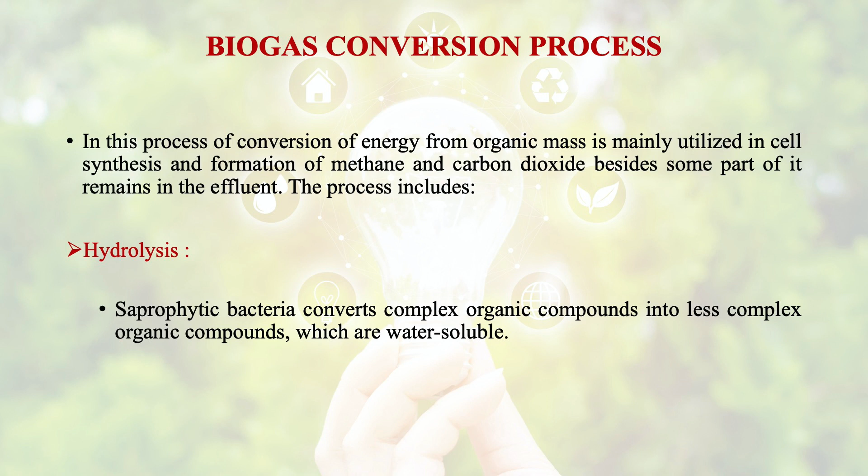The process includes hydrolysis, where saprophytic bacteria convert complex organic compounds into less complex, water soluble organic compounds. Then acid formation, where acid forming bacteria degrade organic compounds to volatile fatty acids and ammonia. Then methane formation, where methane forming bacteria utilize these acids to form methane.

What are the process parameters that affect biogas production? The process consisting of hydrolysis and biomethanation involves three processes, which we have discussed in our previous module. So what are the process parameters affecting biogas production?

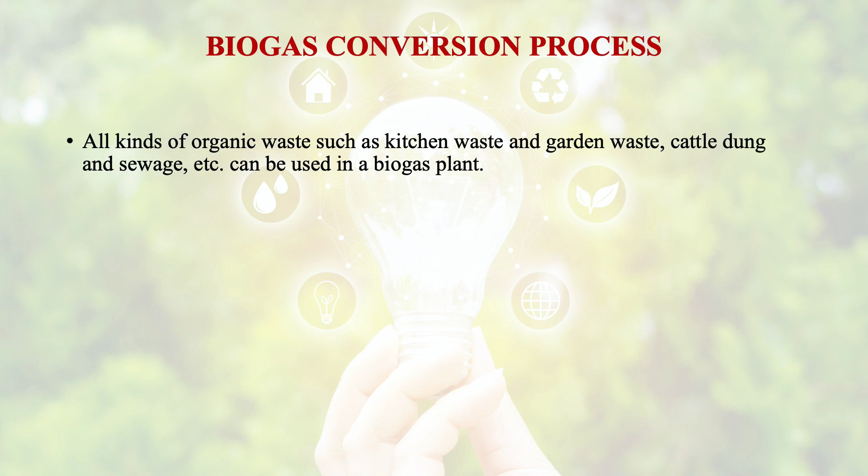All kinds of organic waste such as kitchen waste, garden waste, cattle dung and sewage can be used for the production of biogas. The efficiency of biogas production is affected by process parameters such as the amount of organic material, the digestibility of the material, and a combination of microbial and engineering factors.

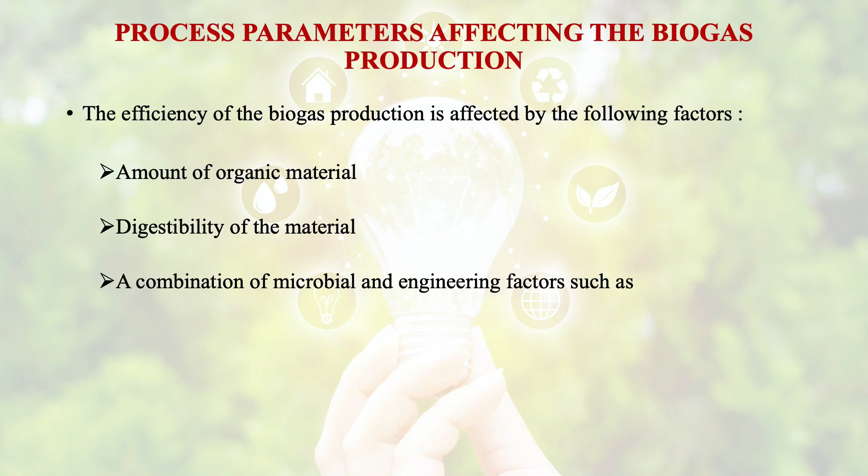The combination of microbial and engineering factors includes organic loading rate, solid concentration, retention time, temperature, carbon to nitrogen ratio, and toxicity.

Amount of organic material: it is obvious that whatever amount we feed into the digester, accordingly we get the biogas, and from the given input and output only we could calculate the efficiency. Another important factor is the digestibility of that material. For example, the digestibility of cow dung will be more than the digestibility of leaves. So it depends upon both the amount and digestibility of the material.

Then comes the combination of microbial and engineering factors, for which I have given some examples. Let's discuss the organic loading rate one by one.

Organic loading rate of a process is a measure of how much organic material is fed to each cubic meter of reactor volume during one day. It means per day, per cubic meter, how much organic material is fed. It will be in kg of VS per meter cube, or COD per meter cube per day.

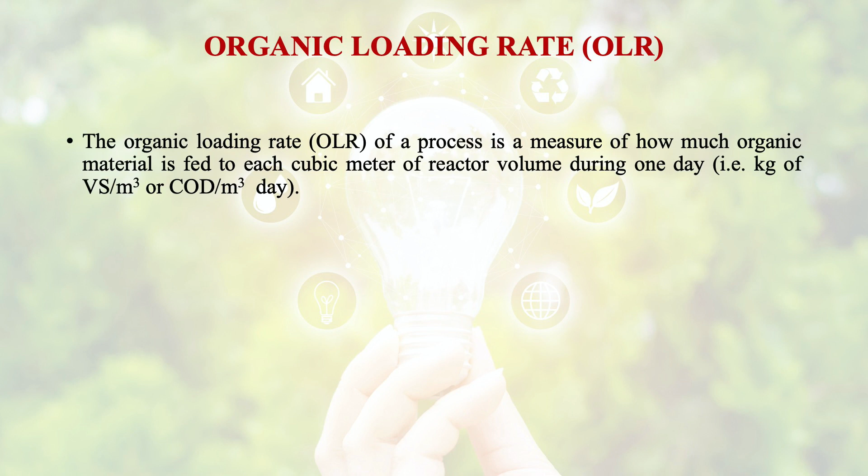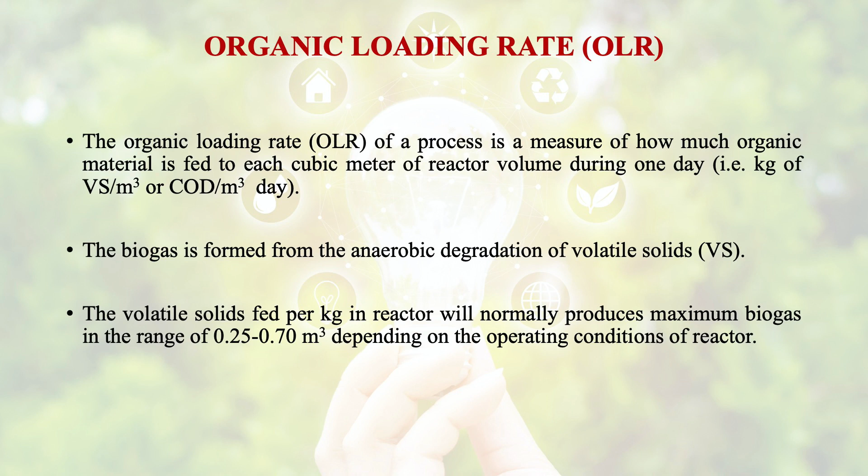Biogas is formed from the anaerobic degradation of volatile solids. The volatile solids fed per kg in the reactor will normally produce maximum biogas in the range of 0.25 to 0.70 meter cube, depending on the operating conditions of the reactor. Accordingly, the loading rate should be in the range of 1 to 1.5 kg volatile solids per meter cube digester per day, which is highly dependent on the reactor design.

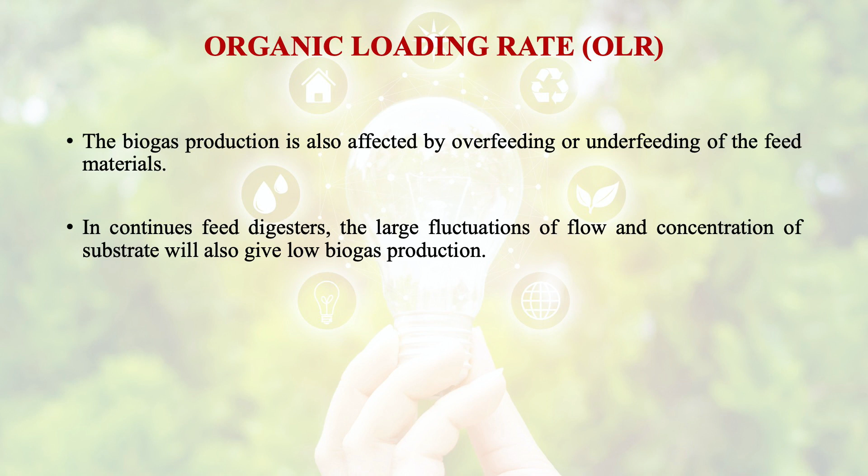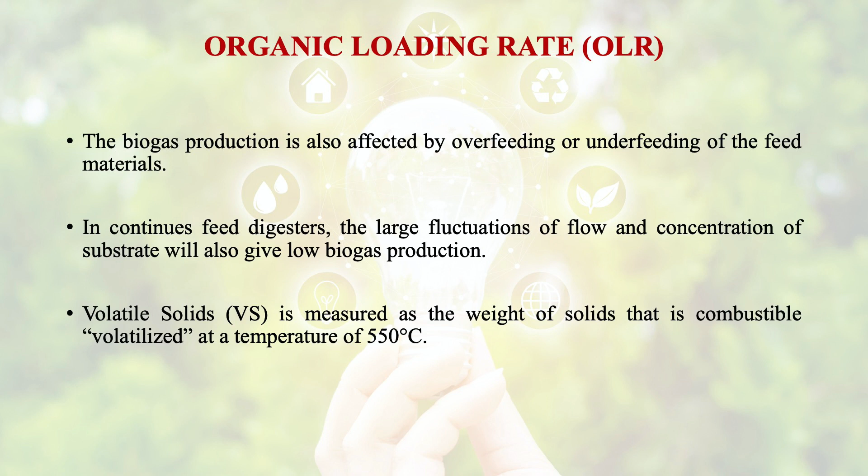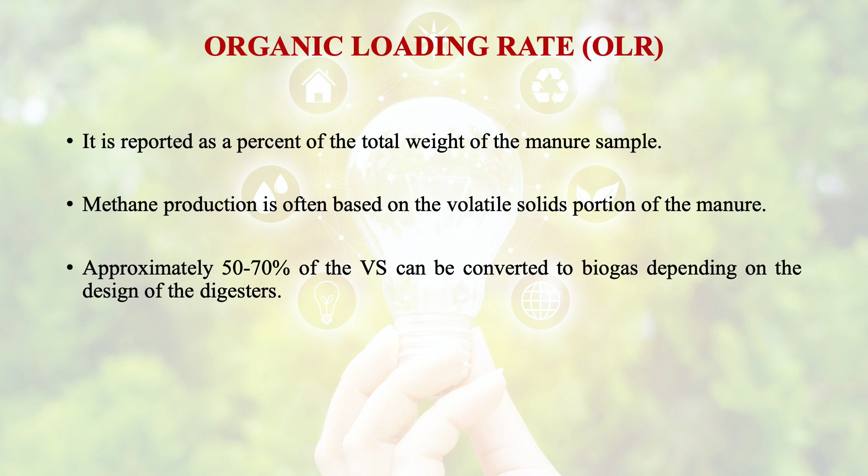Biogas production is also affected by overfeeding or underfeeding of feed materials. In continuous feed digesters, large fluctuations of flow and concentration of substrate will also give low biogas production. Volatile solids is measured as the weight of solids that is combustible and volatilized at a temperature of 550 degrees centigrade, reported as a percent of the total weight of the manure sample. Methane production is often based on the volatile solid portion of the manure, and approximately 50 to 70% of the volatile solids can be converted to biogas, depending on the design of the digester.

Then comes alkalinity. Alkalinity of a liquid is mainly a measure of its acid neutralizing capacity. Carbonate, bicarbonate and hydroxide ions are normally used as neutralizing agents.

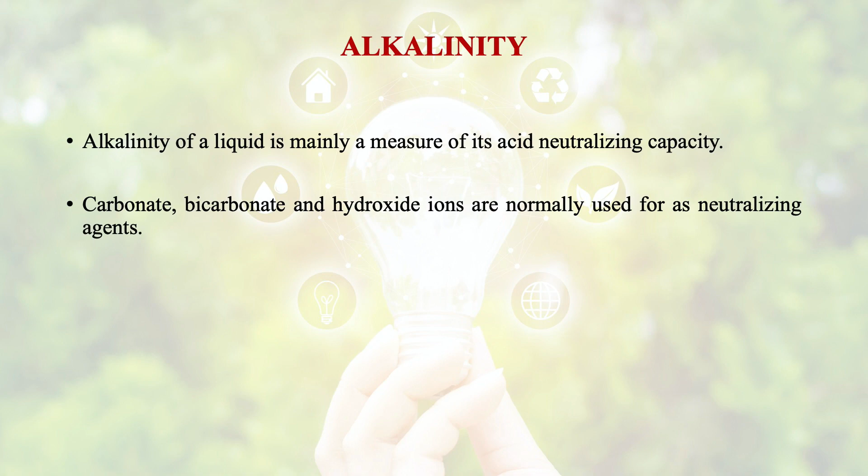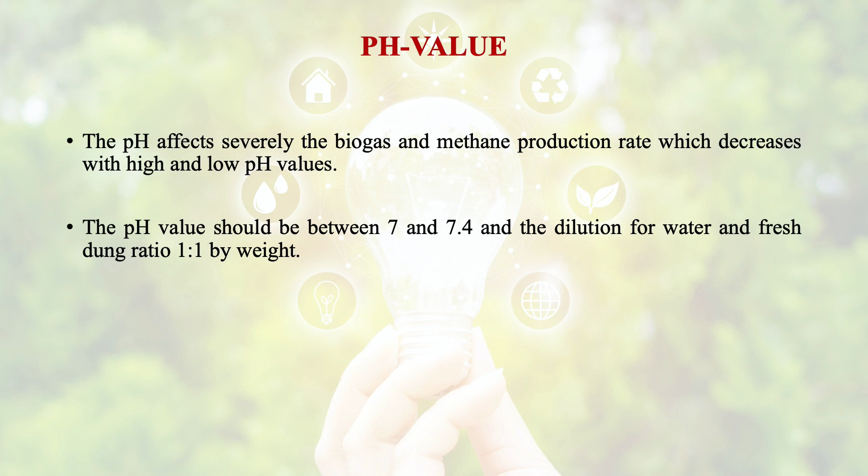Then comes the pH value. The pH severely affects the biogas and methane production rate, which decreases with both high and low pH values. The pH value should be between 7 and 7.4, and the dilution for water and fresh dung should be in the ratio of 1:1 by weight. The maximum percentage of methane can be produced in the optimum pH range of 6.8 to 7.2.

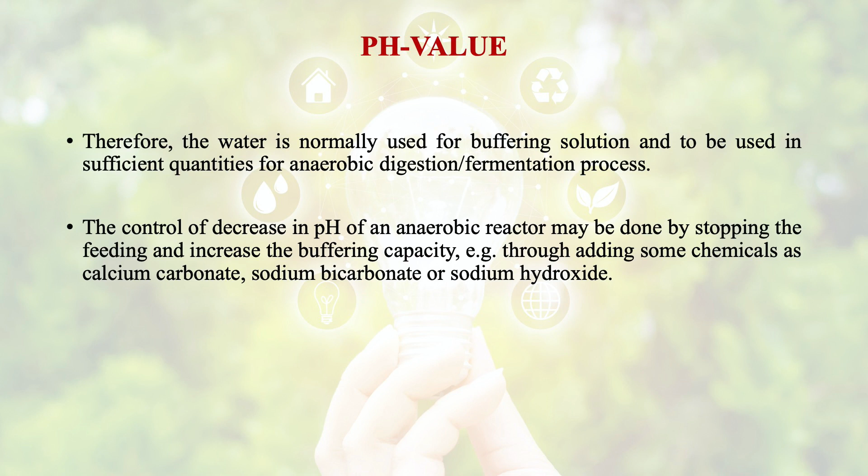The methane forming bacteria cannot survive below 5.5 pH, while acid forming bacteria can survive up to 4.5 pH. So we could not go for the lower or the higher range. Therefore, water is normally used as a buffering solution in sufficient quantities for anaerobic digestion and fermentation process. The control of decrease in pH of an anaerobic reactor may be done by stopping the feeding and increasing the buffering capacity, for example through adding chemicals such as calcium carbonate, sodium bicarbonate or sodium hydroxide.

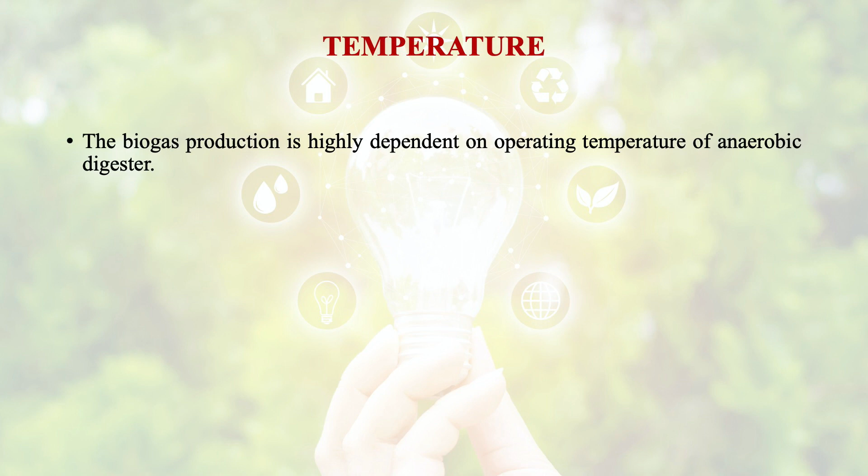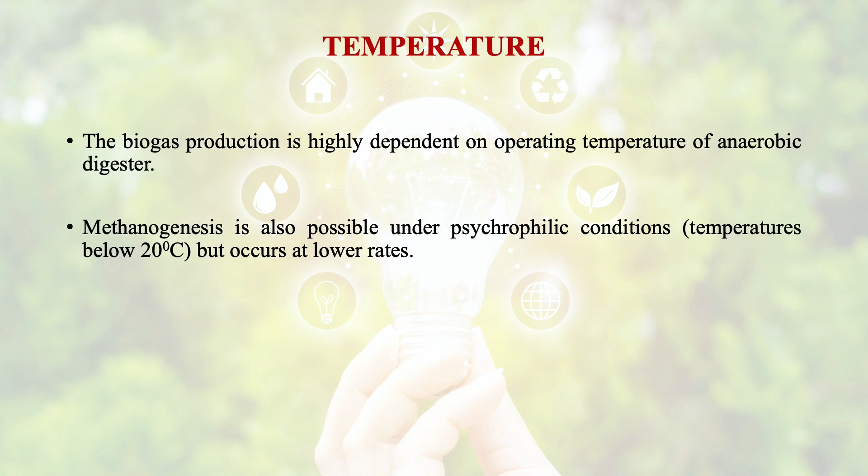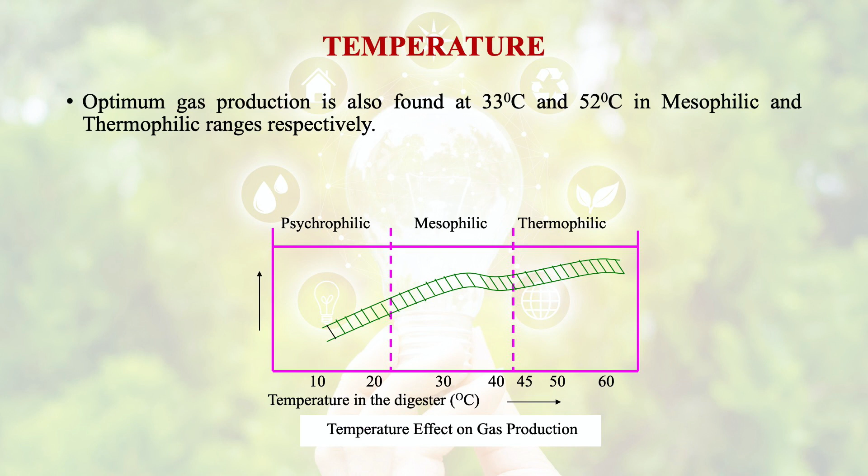Temperature is the third key parameter. Biogas production is highly dependent on the operating temperature of the anaerobic digester. Methanogenesis is possible under psychrophilic conditions, below 20 degrees centigrade, but it occurs at lower rates. The quantity and quality of biogas production differ across temperature ranges. Optimum gas production is found at 33 degrees centigrade in the mesophilic range and 52 degrees centigrade in the thermophilic range. Fluctuations in temperature within these ranges lead to inhibition of methane formation.

Carbon to nitrogen ratio: microorganisms need both nitrogen and carbon for assimilation into their cell structures. This ratio varies from one feedstock to another and is an important parameter affecting biogas production. For example, fruit waste has a carbon to nitrogen ratio of 28 to 35, sewage sludge has 6 to 8, and animal manure without litter has 11 to 25.

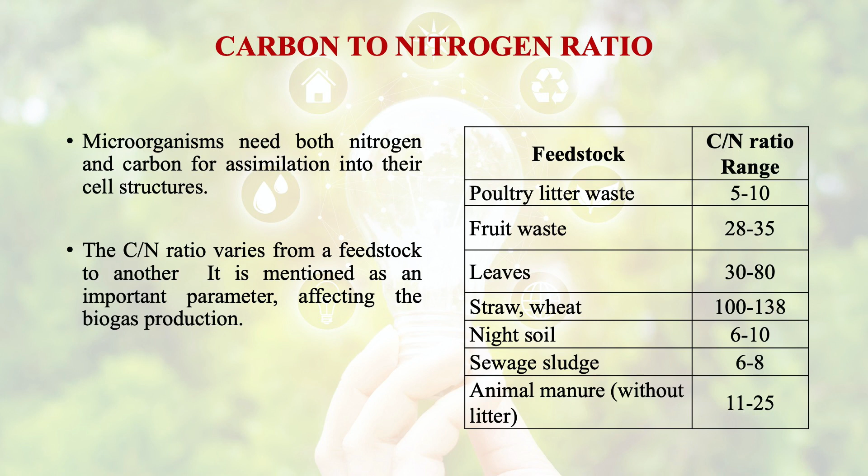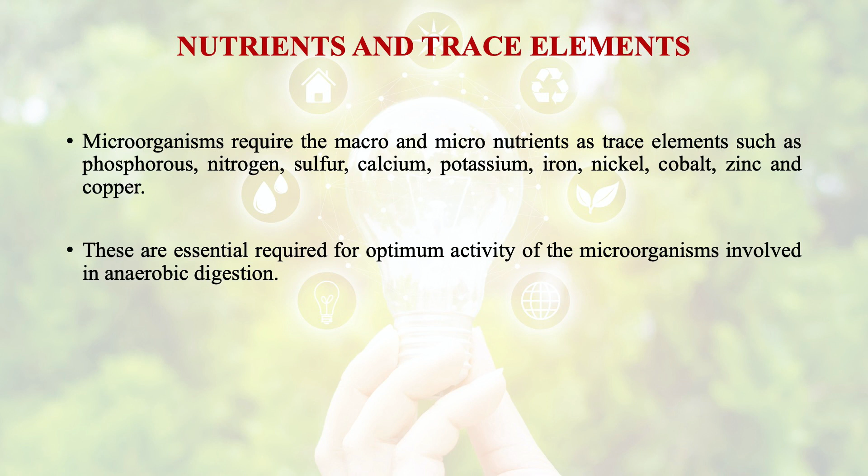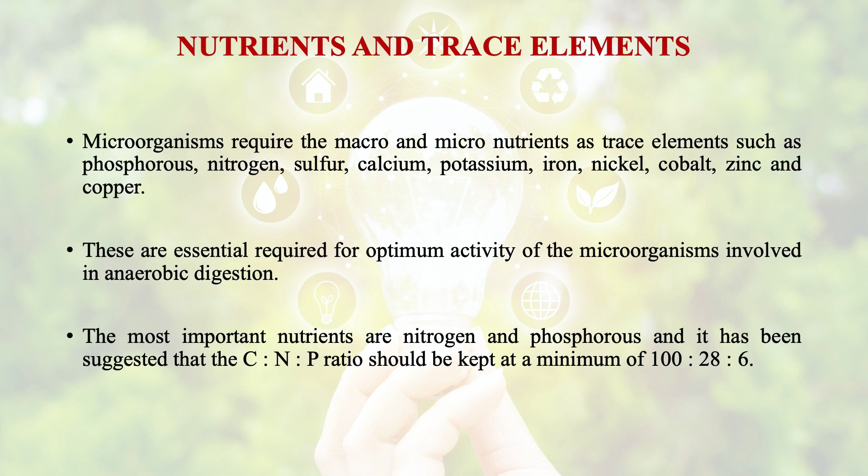Nutrients and trace elements: microorganisms require macro and micronutrients such as phosphorus, nitrogen, sulfur, calcium, potassium, iron, nickel, cobalt, zinc and copper. These are essential for optimum activity of the microorganisms involved in anaerobic digestion. The most important nutrients are nitrogen and phosphorus, and it has been suggested that the carbon, nitrogen and phosphorus ratio should be kept at a minimum of 100:28:6.

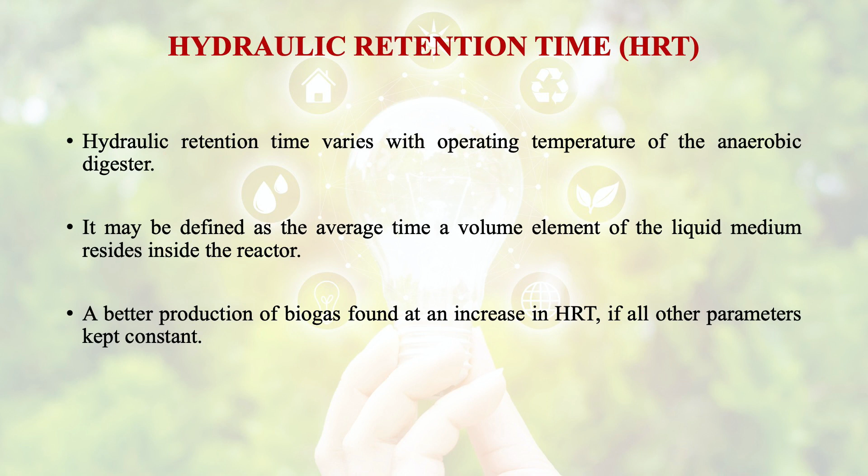Hydraulic retention time varies with the operating temperature of the anaerobic digester. It is defined as the average time a volume element of the liquid medium resides inside the reactor. Better biogas production is found with an increase in HRT, if all other parameters are kept constant. Anaerobic digestion can be performed with a relatively short hydraulic retention time, a high rate system, or with a long hydraulic retention time, a low rate system.

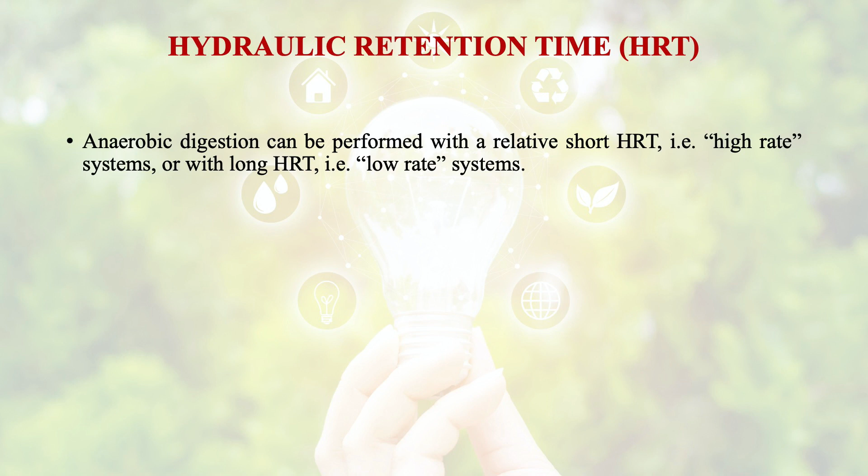Low rate systems are normally used to digest slurries and solid waste, while high rate systems are usually used for treatment of wastewater.

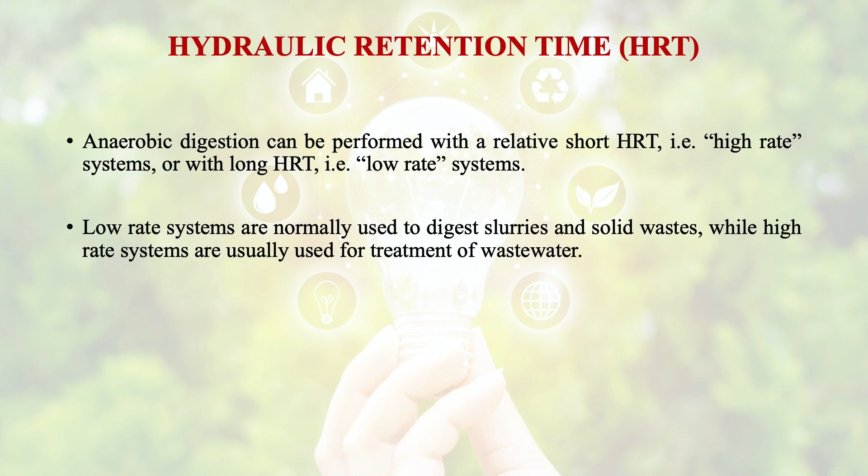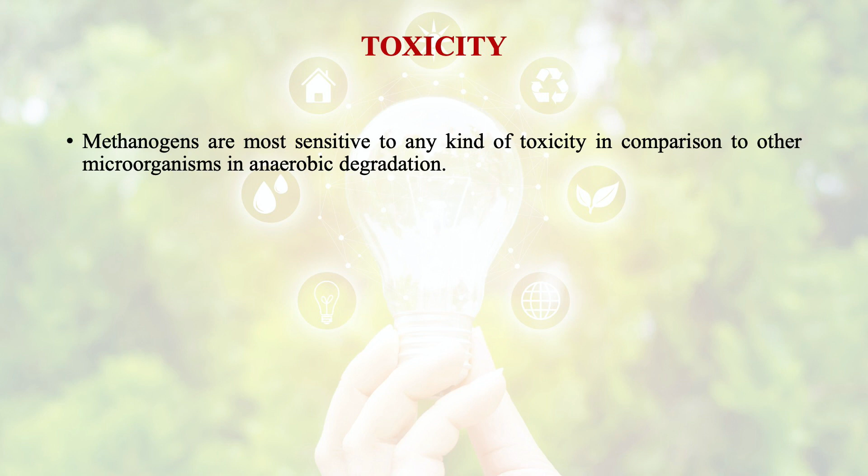Toxicity: methanogens are more sensitive to any kind of toxicity compared to other microorganisms in anaerobic degradation. Degree of mixing is a control process to keep the pH and environmental conditions of the slurry uniform in the digester. It distributes buffering agents throughout the reactor volume and prevents localized buildup of high concentrations of intermediate metabolic products, which may inhibit methanogenic activities.

Now let's look at the types of biogas plants. Anaerobic digester design has continued to evolve over the years, but systems generally show variations around the theme of the floating drum and fixed dome designs. Often construction materials vary, or loading positions differ.

Some of the most common biogas plants recognized by the Ministry of New and Renewable Energy, Government of India, include the floating drum plant with a cylindrical digester, known as the KVIC model; the fixed dome plant with a brick-reinforced molded dome, known as the Janata model; and the floating drum plant with a hemisphere digester.

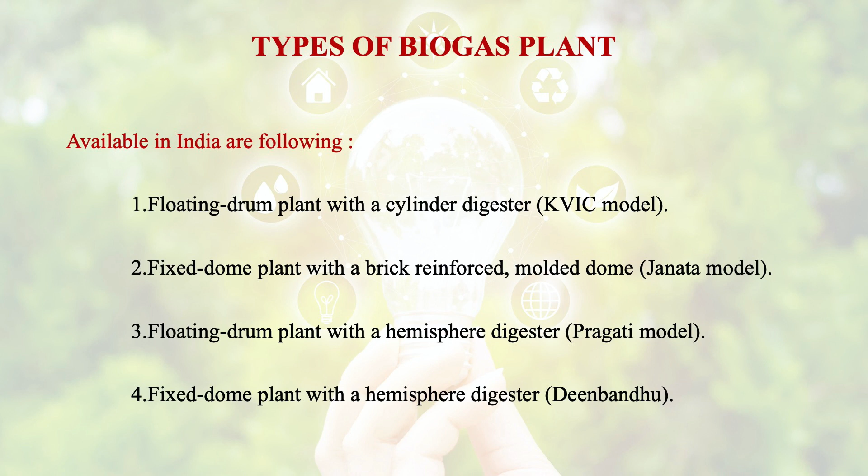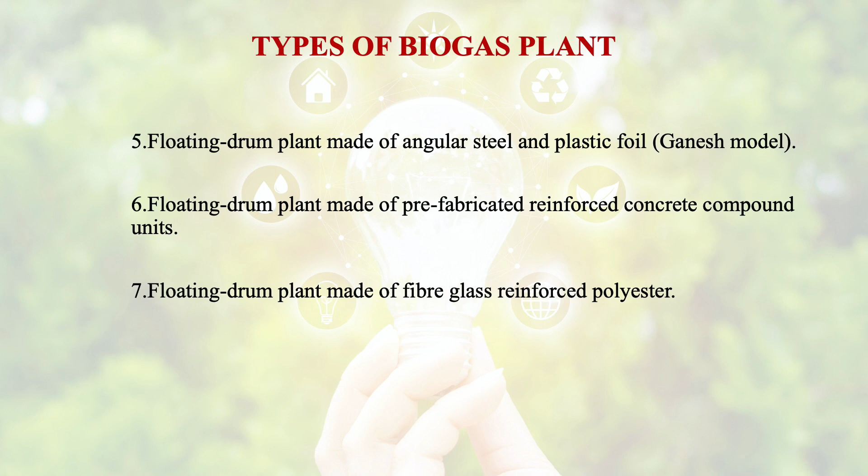In the floating drum plant with hemisphere digester, the shape of the digester is changed but other things are similar to the KVIC model; it is known as the Pragati model. The fixed dome plant with a hemisphere digester is the Deenbandhu model. The floating drum plant made of angular steel and plastic foil is the Ganesh model. There are also floating drum plants made of prefabricated reinforced concrete compound units, and floating drum plants made of fiberglass-reinforced polyester.

Based on feed method, we also classify biogas plants into batch plants, continuous plants, and semi-continuous plants.

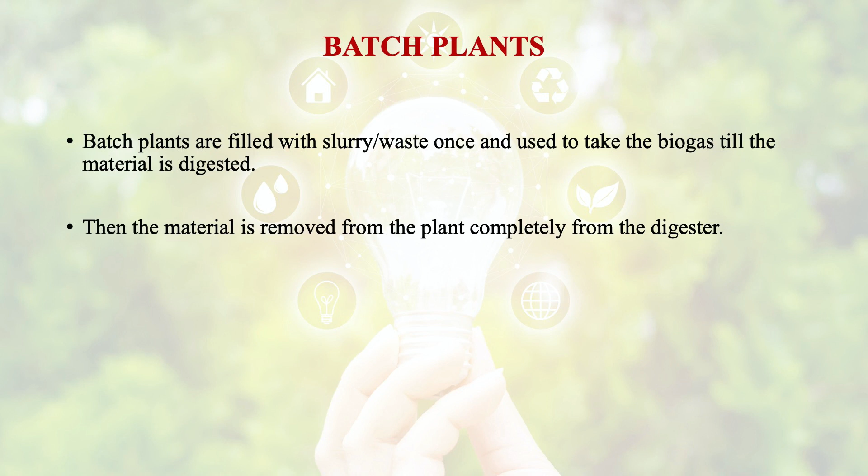Batch plants are filled with slurry or waste once and used to take biogas until the material is fully digested, after which the material is removed completely from the digester. The major drawbacks of batch plants are that waste is not completely digested, biogas is not formed uniformly leading to an interrupted supply of gas, and emptying the digester for fresh material is the most tedious and highly labor-intensive work.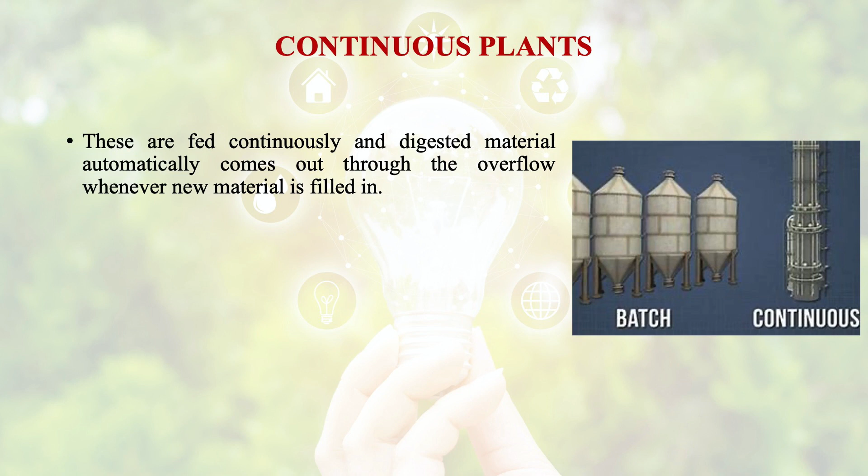Continuous plants are fed continuously, and digested material automatically comes out through overflow whenever new material is filled in. The waste material is first converted to fluid form, generally by adding the appropriate amount of water. Biogas production is better and more uniform in continuously fed plants than in batch plants. Today, nearly all industrial or commercial biogas plants operate in continuous mode.

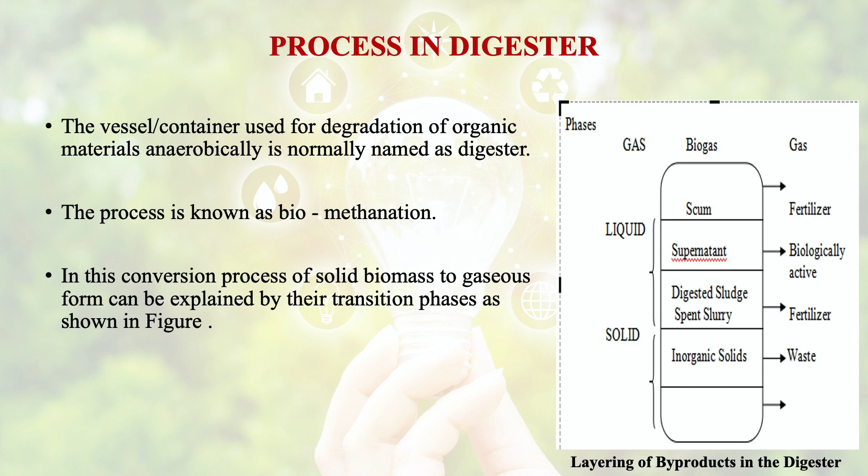Then comes the process in the digester. The vessel or container used for degradation of organic materials through anaerobic digestion is normally termed a digester, and the process is known as biomethanation. This conversion of solid biomass to gaseous form takes place through transition phases.

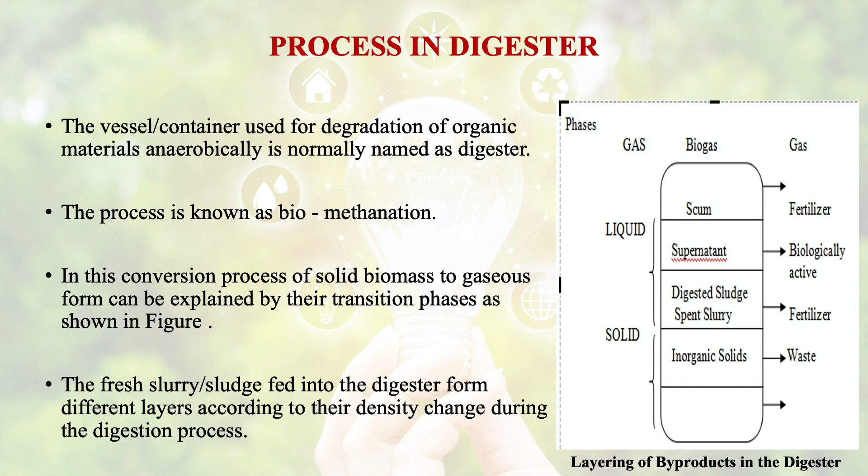In the first step, fresh slurry or sludge is fed into the digester, forming different layers according to density changes during digestion. Inorganic materials, being heavier than the organic part of slurry, settle at the bottom, creating two layers of high solid content: inorganic solids and fresh slurry sludge.

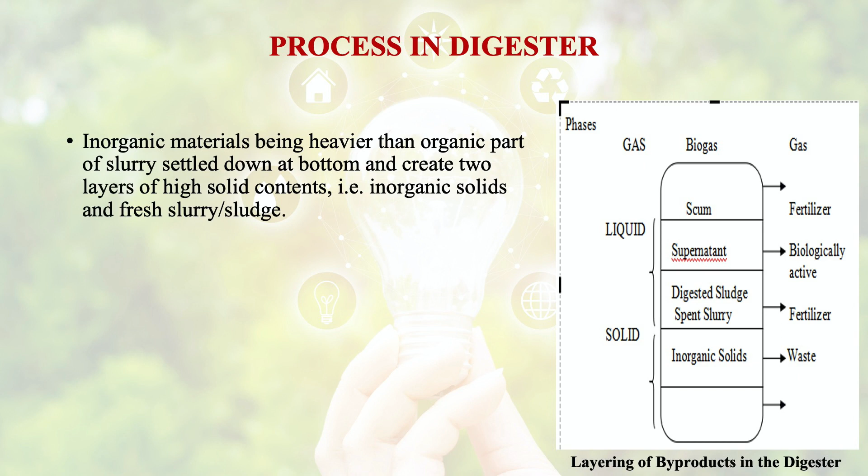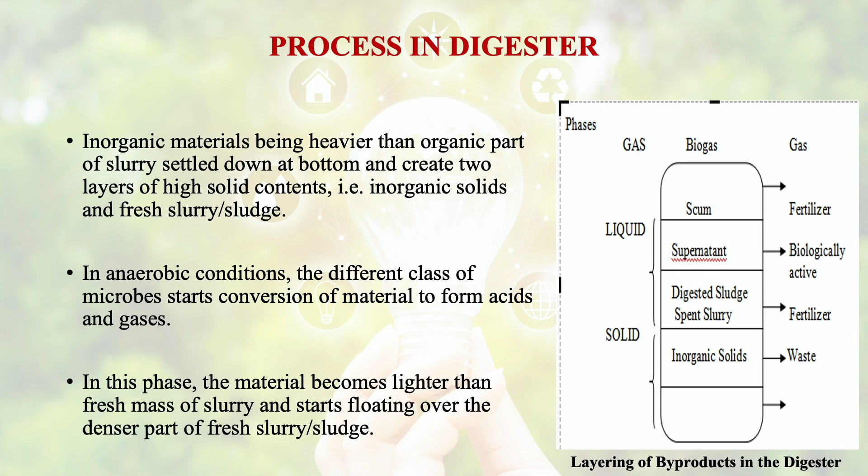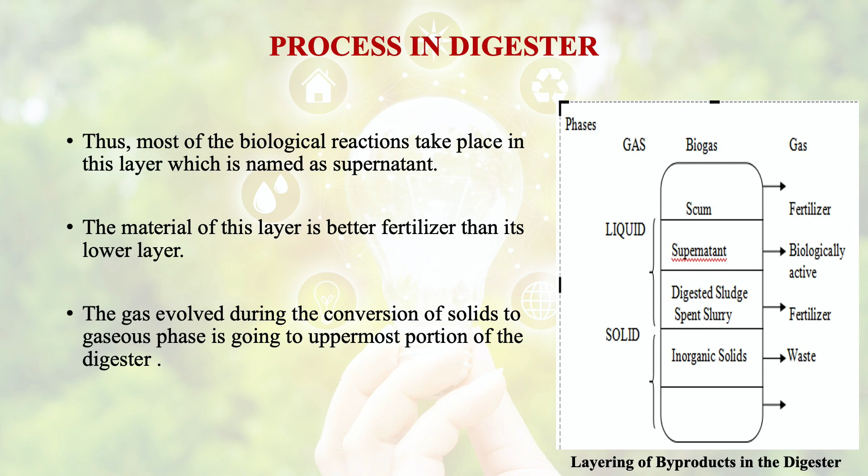In anaerobic conditions, different classes of microbes start converting material into acids and gases. This makes the material lighter than the fresh slurry, causing it to float over the denser layer. Most biological reactions take place in this floating layer, called the supernatant, whose material is a better fertilizer than the lower layer. The gas evolved during conversion rises to the uppermost portion of the digester.

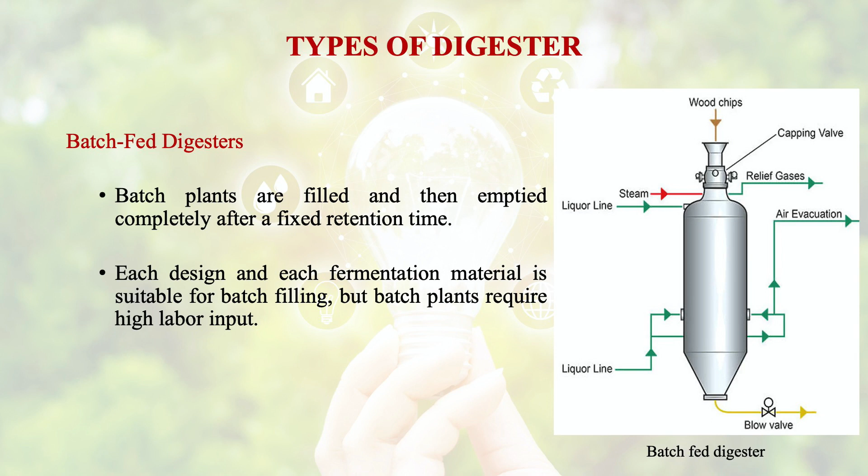Then comes the batch fed digesters. Batch plants are filled and then emptied completely after a fixed retention time. Each design and fermentation material is suitable for batch filling, but batch plants require high labor input, and as a major disadvantage, their gas output is not steady.

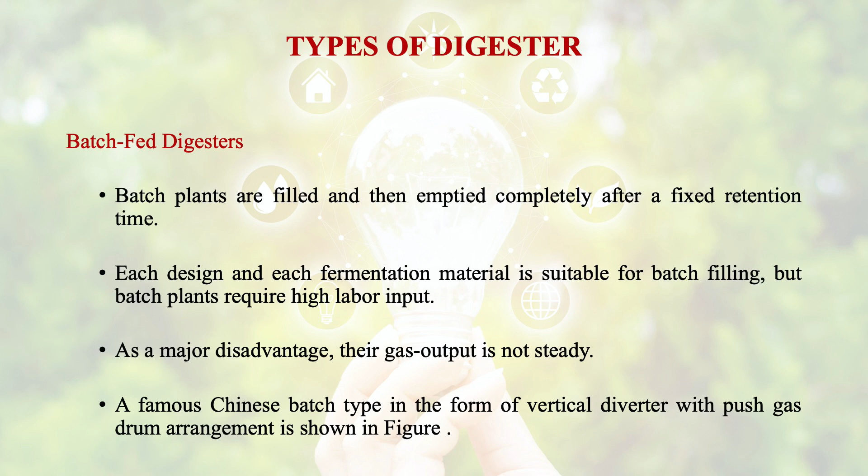A famous Chinese batch type is in the form of a vertical digester with a floating gas drum arrangement. The vertical cylindrical pit is filled with organic waste material, solid or semi-solid, and an inverted drum of slightly smaller diameter is pushed over it. The floating drum has a supply pipe and valve to regulate the biogas.

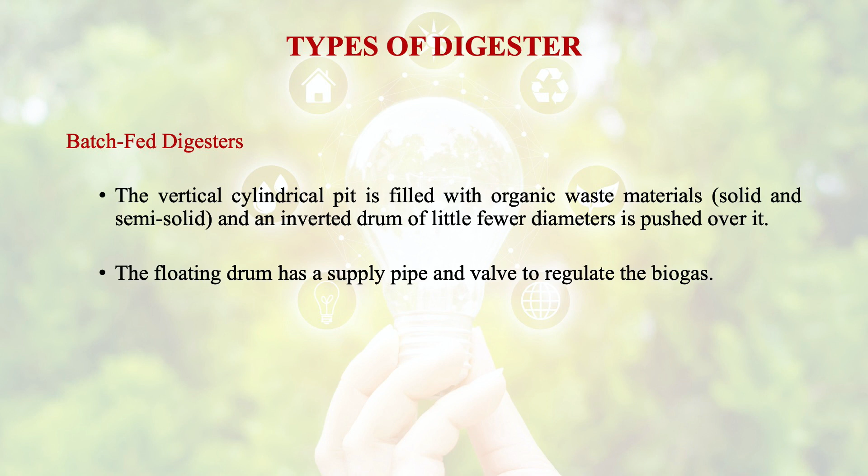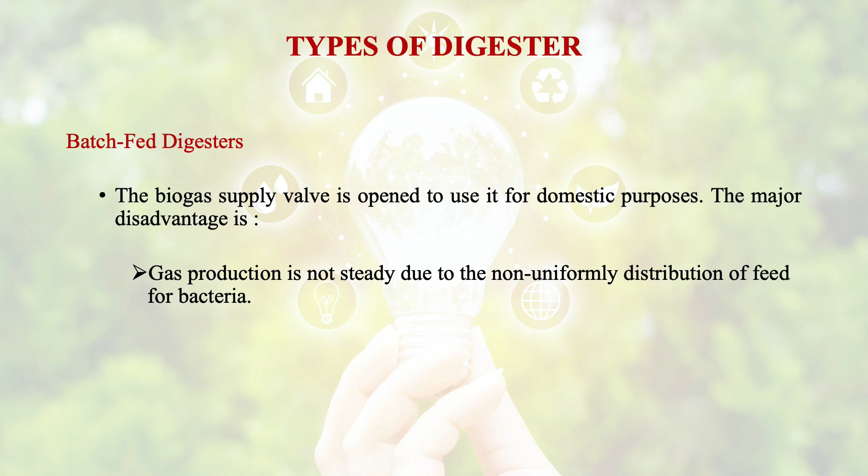After some time, the material starts decomposing in the presence of anaerobic microbes. The biogas production uplifts the drum and gas fills it. The biogas supply valve is opened for domestic use. The major disadvantage is that gas production is not steady due to non-uniform distribution of feed for bacteria, and removal of digested material is labor intensive and tedious work.

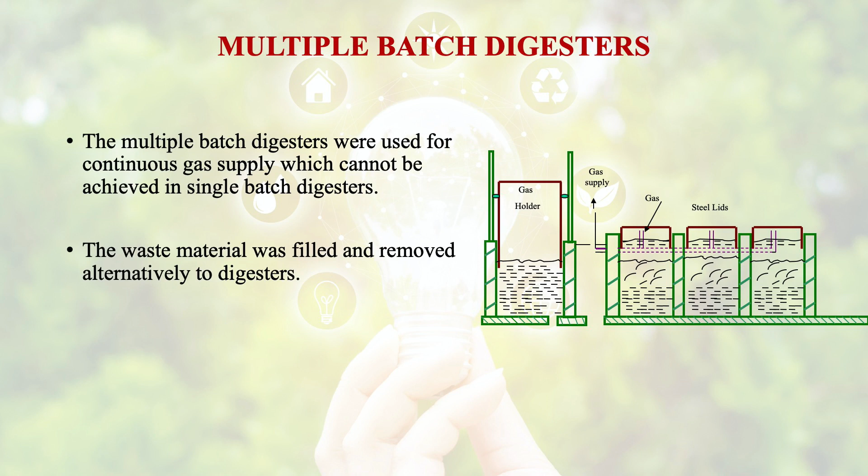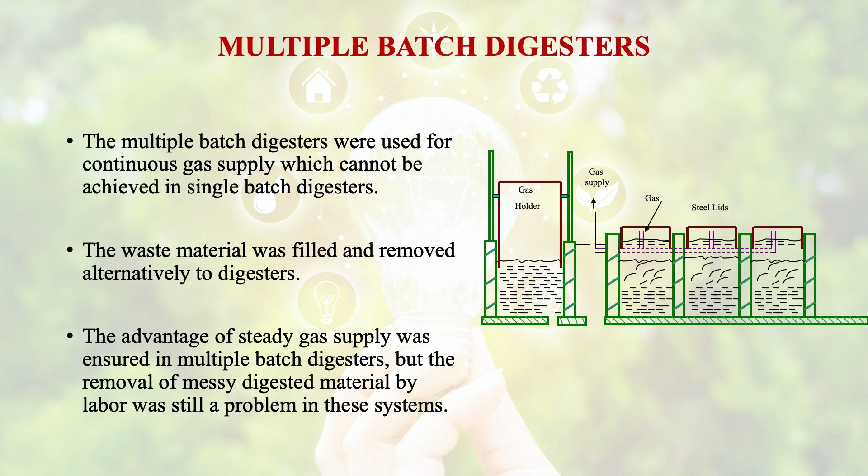Then comes multiple batch digesters. In multiple batch digesters, continuous gas supply is required, which cannot be achieved in single batch digesters. The waste material is filled and removed alternately between digesters. This ensures a steady gas supply, but removal of the messy digested material by labor was still a problem in these systems.

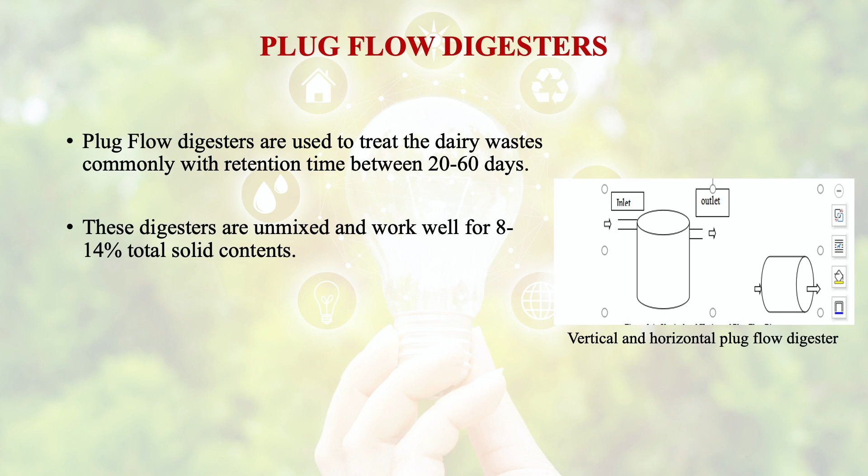Then came the plug flow digesters. These digesters are used to treat dairy waste, commonly with retention time between 20 to 60 days. They are unmixed and work well for 8 to 14% total solid content, operating in semi-continuous mode in the mesophilic range. The reactor may be a horizontal tubular tank placed underground or on ground.

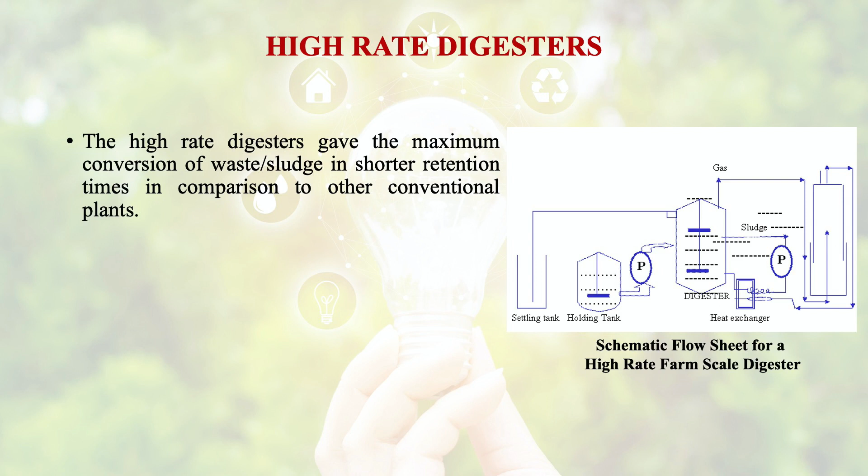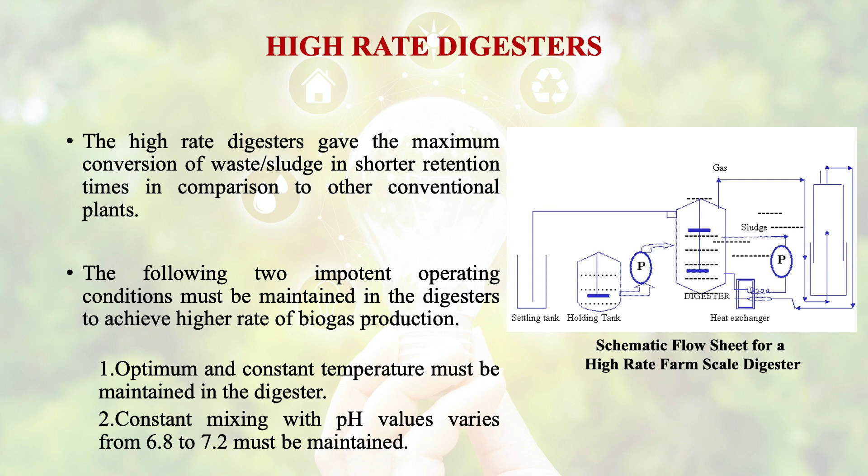Then comes high rate digesters, which give maximum conversion of waste or sludge in shorter retention time compared to other conventional plants. Two important operating conditions must be maintained to achieve high rate biogas production: first, optimum and constant temperature; second, constant mixing with pH values maintained from 6.8 to 7.2.

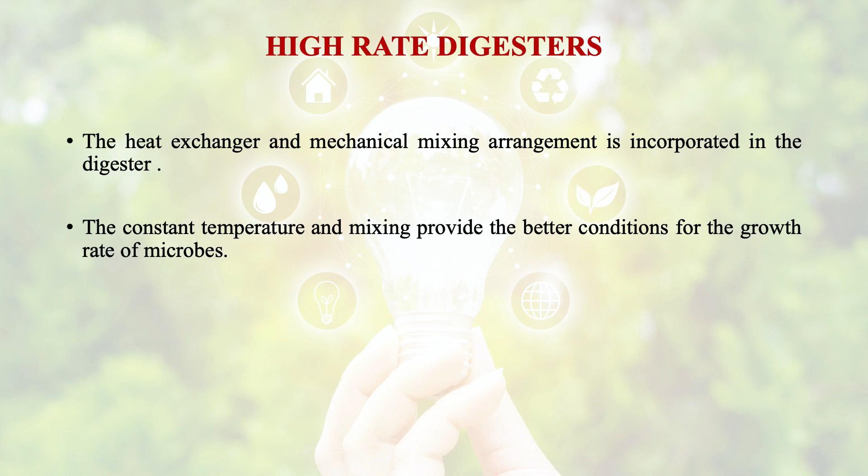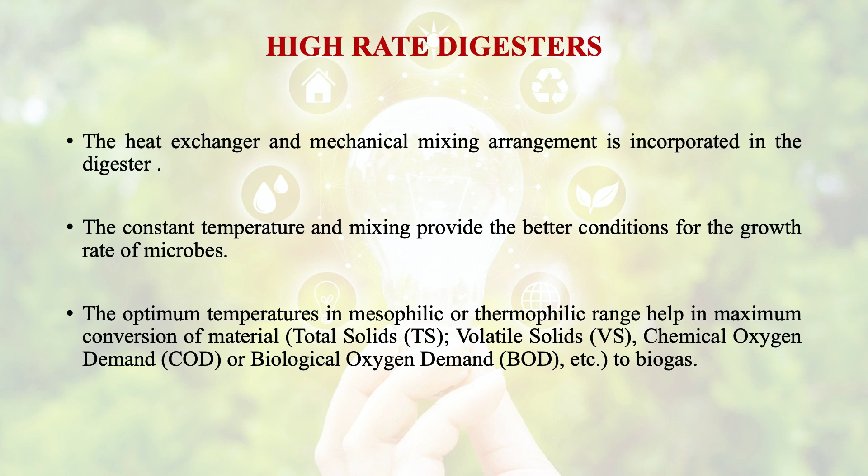A heat exchanger and mechanical mixing arrangement are incorporated into the digester. The constant temperature and mixing provide better conditions for microbial growth. The optimum temperature in the mesophilic or thermophilic range helps maximum conversion of material—total solid, volatile solid, chemical oxygen demand, or biological oxygen demand—to biogas.

In India, we generally use two types of biogas plants in rural areas: first, the floating drum biogas digester, and second, the fixed dome biogas plant. Among floating drum plants, the KVIC model with a cylindrical digester is the oldest and most widespread floating drum biogas plant in India.

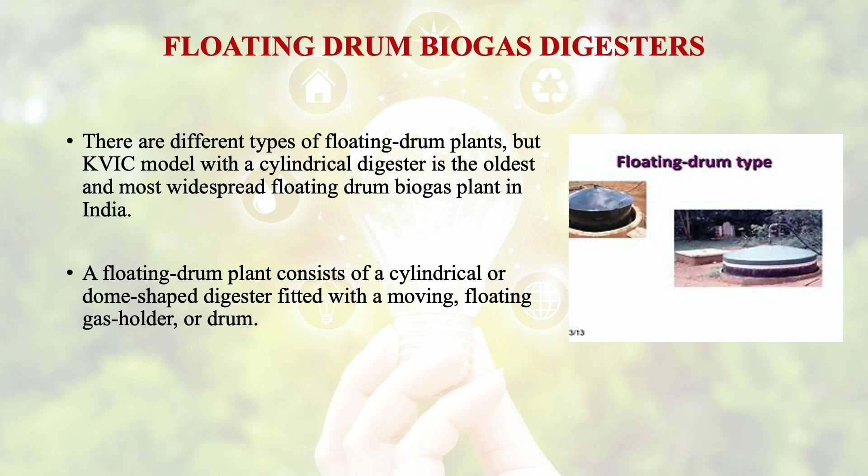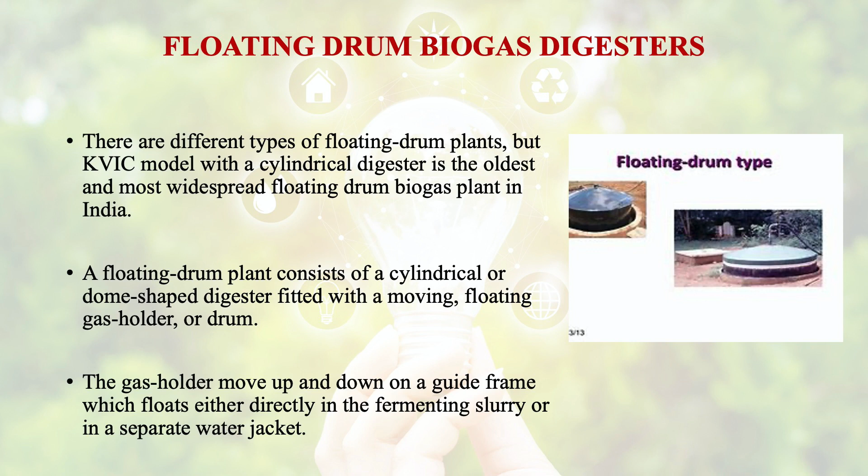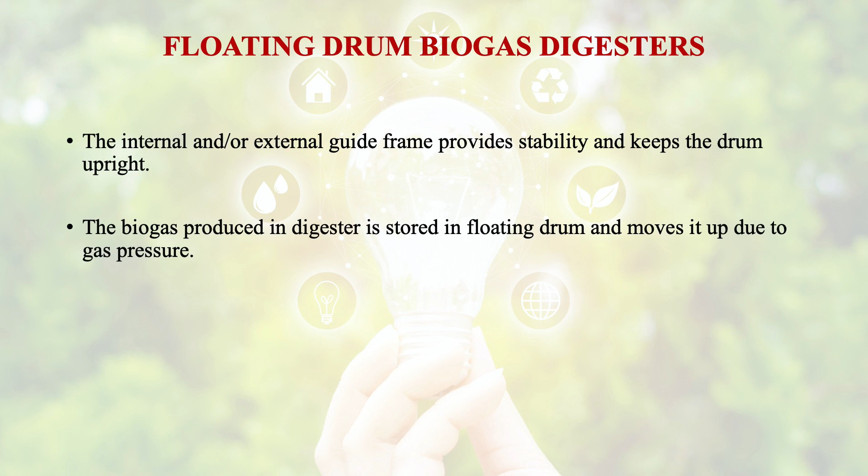A floating drum plant consists of a cylindrical or dome-shaped digester fitted with a moving floating gas holder or drum. The gas holder moves up and down on a guide frame, floating either directly in the fermenting slurry or in a separate water jacket. The internal or external guide frame provides stability and keeps the drum upright. The biogas produced is stored in the floating drum, lifting it due to gas pressure; if gas is consumed, the holder sinks back due to its weight.

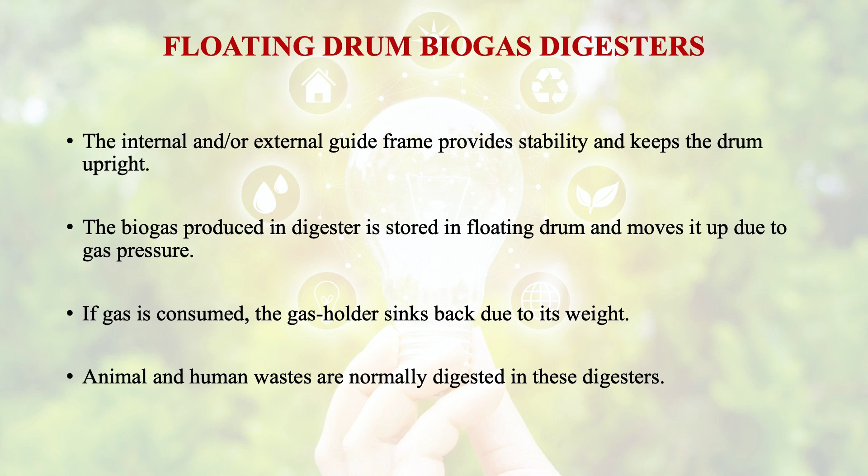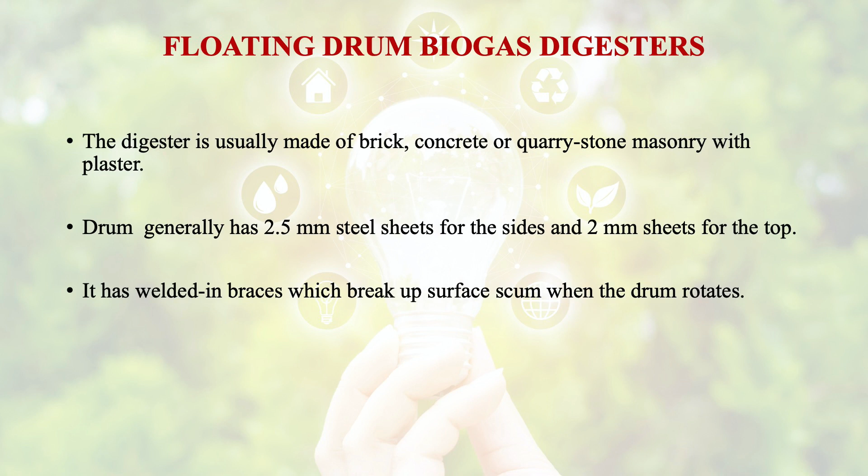Animal and human waste are normally digested in these digesters, usually made of brick, concrete, or quarry stone masonry with plaster. The gas drum normally consists of 2.5 mm steel sheets for the sides and 2 mm sheets for the top, with welded-in braces that break up surface scum when the drum rotates. The drum must be protected against corrosion.

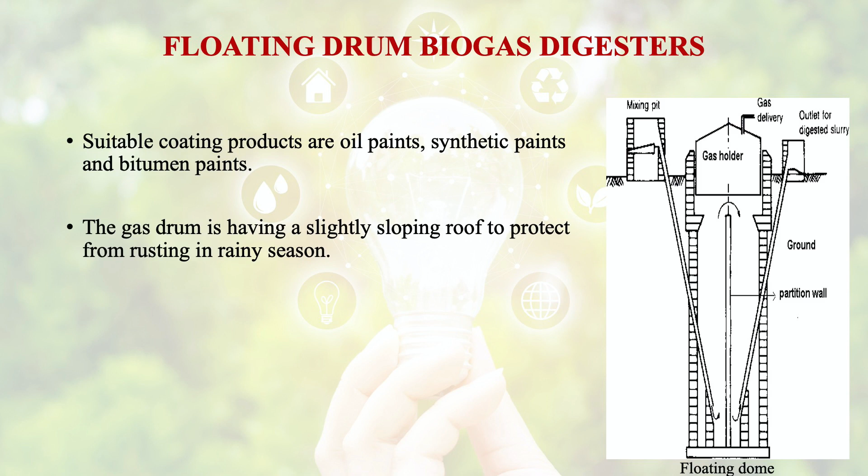Suitable coating products are oil paints, synthetic paints, and bitumen paints. The gas drum has a slightly sloping roof to protect it from rusting in the rainy season. Floating drums made of glass fiber reinforced plastic and high density polyethylene have been used successfully, but their construction costs are higher compared to using steel.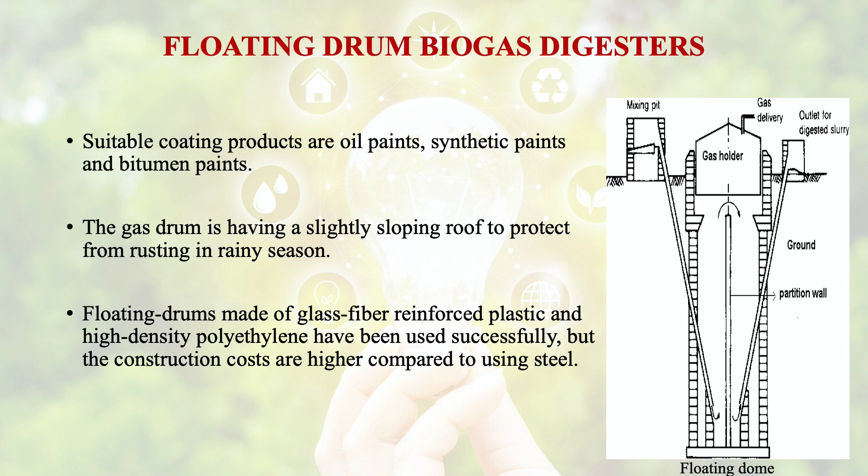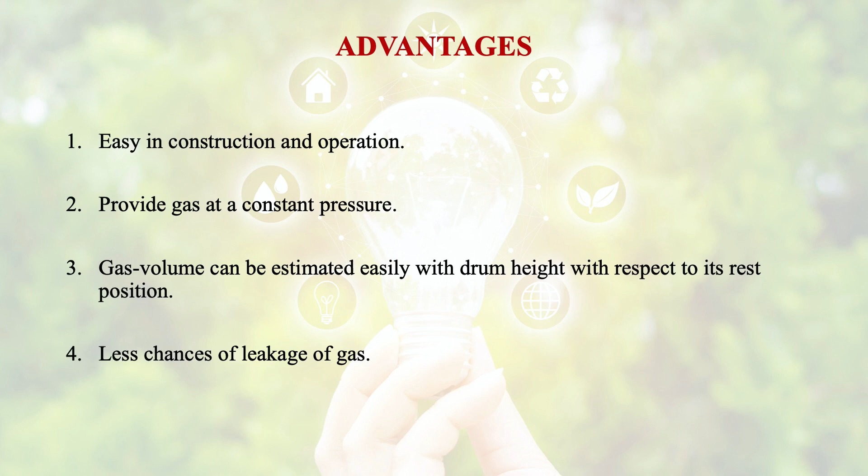Advantages of this kind of plants are easy in construction and operation, provide gas at a constant pressure, and gas volume can be estimated easily with drum height with respect to its rest position, with less chance of leakage of gas. Disadvantages are transportation to remote villages is difficult and expensive, cost of a steel drum is high, corrosion problems occur sometimes so maintenance is high, and life of the drum is short compared to masonry digesters.

The daily input amount of slurry is fed once or twice a day. Plants with capacity of 2 to 20 cubic meters are used by farmers for domestic needs, while bigger plants of 25 to 140 cubic meters are constructed and used by institutions or industries.

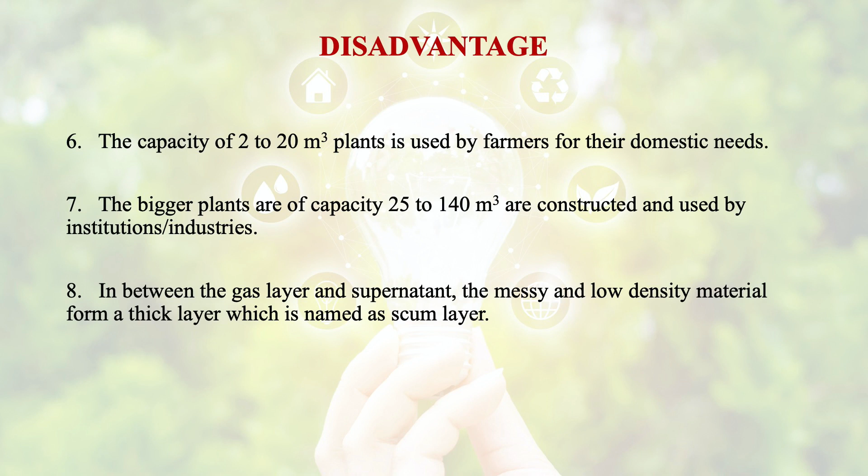In between the gas layer and supernatant, the messy low density material forms a thick layer called the scum layer. In practice, this layer must be broken to avoid accumulation of gas in lower layers of the digester, since gas accumulation will inhibit gas production by decreasing microbial growth rates. Mixing is essential to break the scum layer and to distribute microbes and solids uniformly for better conversion.

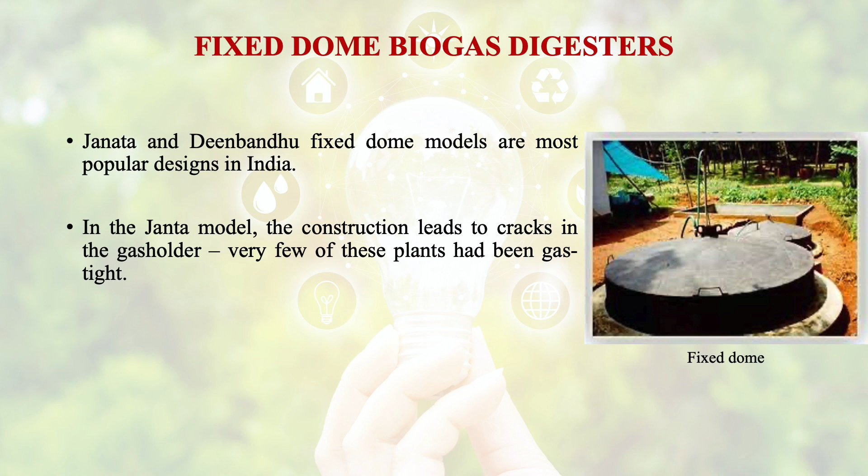Next are the fixed dome biogas digesters. Janta and Deenbandhu fixed dome models are the most popular designs in India. In the Janta model, construction leads to cracks in the gas holder, and very few of these plants have been gas tight. The Deenbandhu model, with improved design, is mostly constructed in villages; it is more crack proof and uses less building material than the Janta plant with a hemisphere digester.

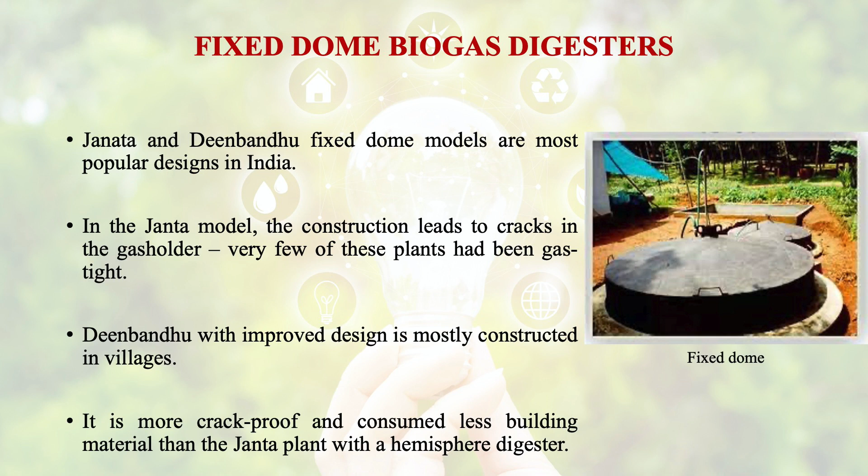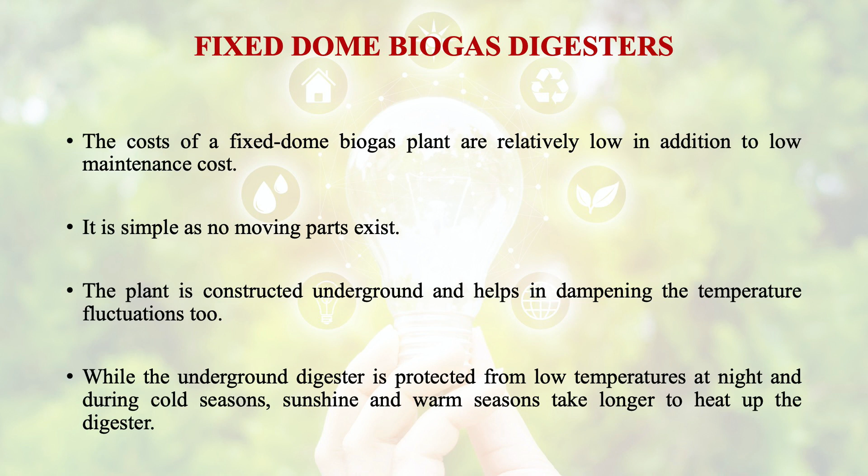The cost of a fixed dome biogas plant is relatively low, with low maintenance cost, and it is simple with no moving parts. The plant is constructed underground, which helps temper temperature fluctuations. The underground digester is protected from low temperature at night, and during cold seasons, sunshine and warm seasons take longer to heat up the digester.

The complete digester system requires several components: digester, inlet mixing tank, outlet tank, gas outlet, pipe, pipelines and valves, manure collection pit, gas utilization appliances, and water removal.

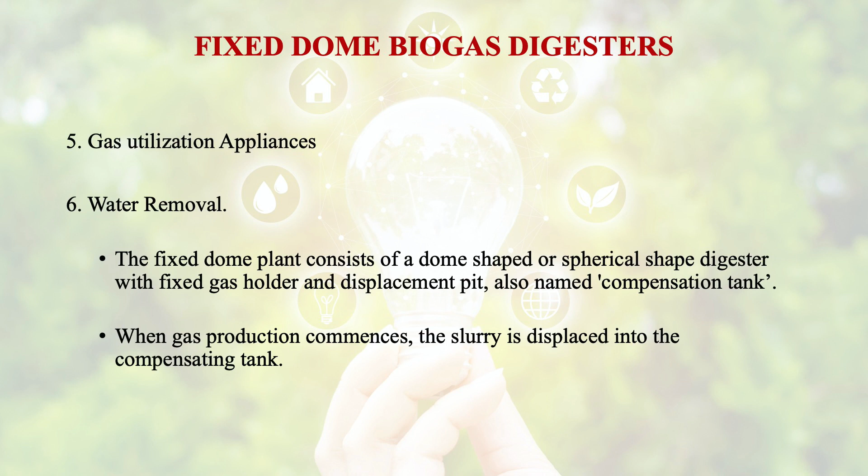The fixed dome plant consists of a dome-shaped or spherical digester with a fixed gas holder and a displacement pit, also called a compensation tank. When gas production commences, slurry is displaced into the compensating tank. Gas pressure increases with the volume of gas stored, that is, with the height difference between the two slurry levels. If there is little gas in the gas holder, the gas pressure is low.

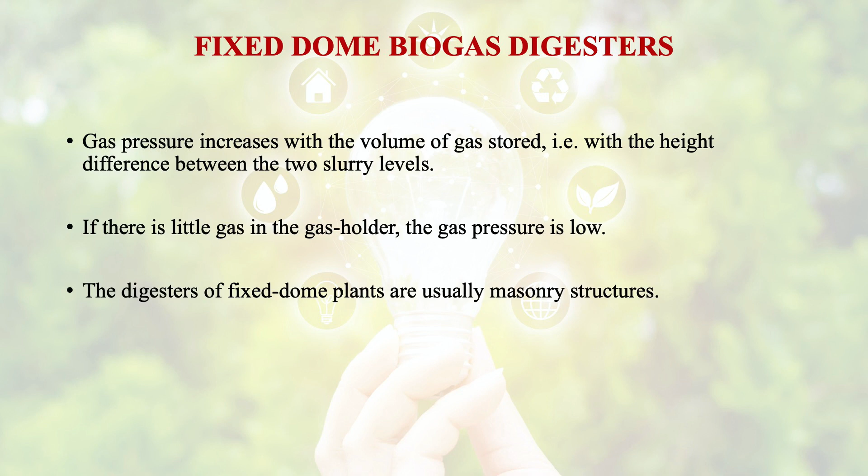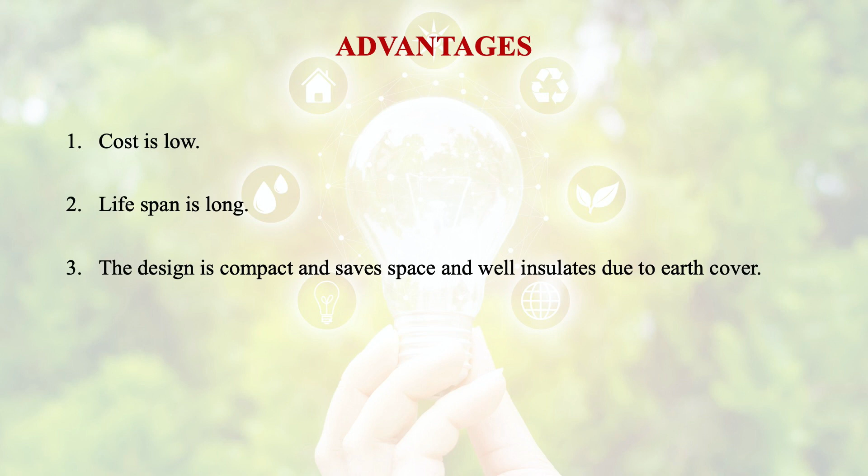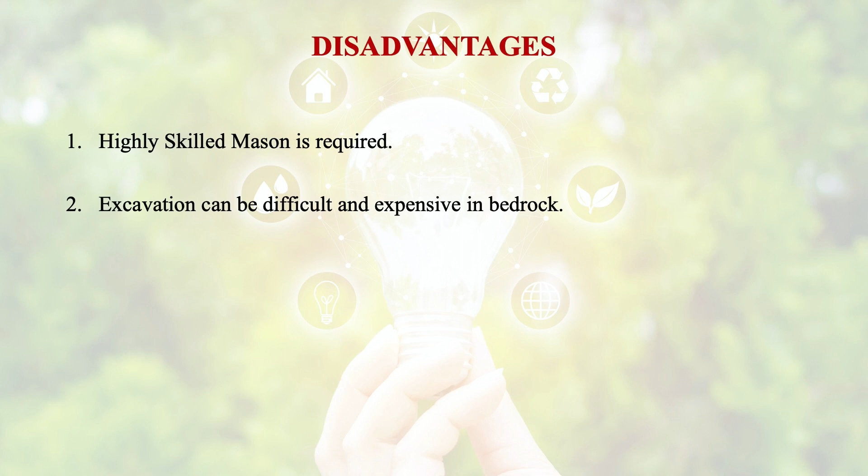The digesters of fixed dome plants are usually masonry structures. Advantages are: low cost, long lifespan, a compact design that saves space, and good insulation due to earth cover. Disadvantages are: a highly skilled mason is required, excavation can be difficult and expensive in bedrock, and fluctuating gas pressure decreases utilization efficiency.

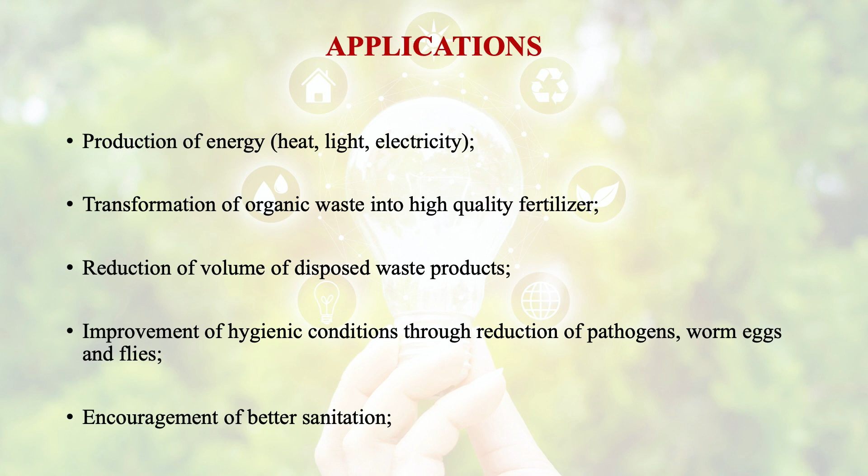Applications of biogas include production of energy for heat, light and electricity, transformation of organic waste into high quality fertilizer, reduction of disposed waste volume, improvement of hygienic conditions through reduction of pathogens, worm eggs and flies, encouragement of better sanitation, and reduction of workload mainly for women in firewood collection and cooking. If purified, it could be used in internal combustion engines, and could be enriched for such applications.

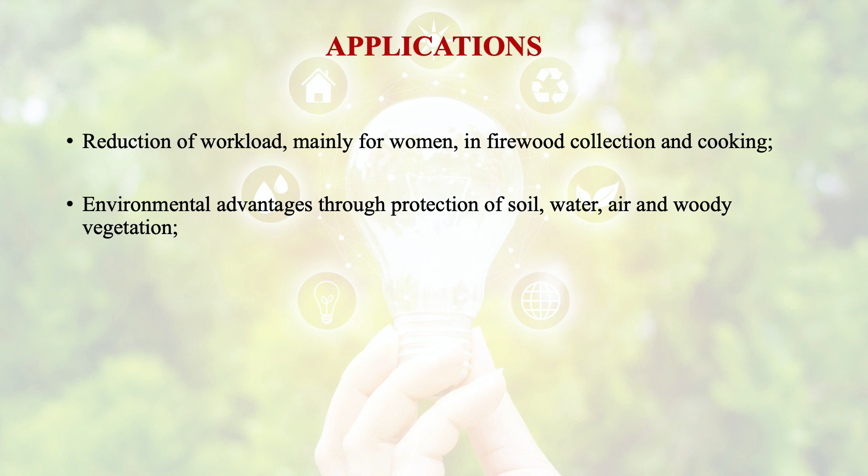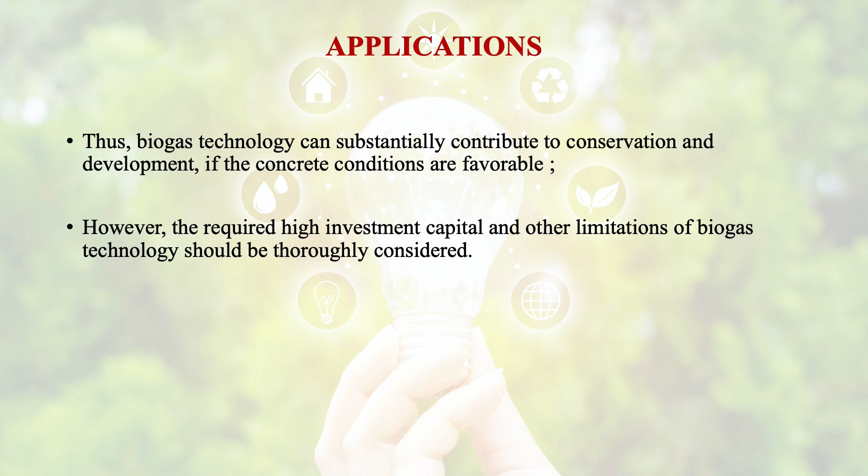Environmental advantages come through protection of soil, water, air and woody vegetation. Microeconomical benefits arise through energy and fertilizer substitution, additional income sources, and increasing yields of animal husbandry and agriculture. Other advantages are macroeconomical benefits through decentralized energy generation, import substitution and environmental protection. Thus biogas technology can substantially contribute to conservation and development if concrete conditions are favorable. However, the required high investment capital and other limitations of biogas technology should be thoroughly considered.

So in this module, we have learned the technologies developed for biogas production, and we have seen that they are simple and can be managed at the village level. Raw material for biogas is not limited to gobar or cow dung; it has shifted to include biomass such as kitchen waste, vegetable waste, water hyacinth, banana stem, poultry waste, piggery manure, etc. The compost obtained from biogas is better than farmyard manure and maintains the nutritive value of soil.

We had discussed the biogas plants commonly used in India, the types of digesters, and batch, continuous and semi-continuous plants. We had discussed their relative advantages, and the type of plant most suitable for the Indian scenario. We also discussed that these could be better utilized in villages and could be an alternative source for energy production in rural or suburban areas.